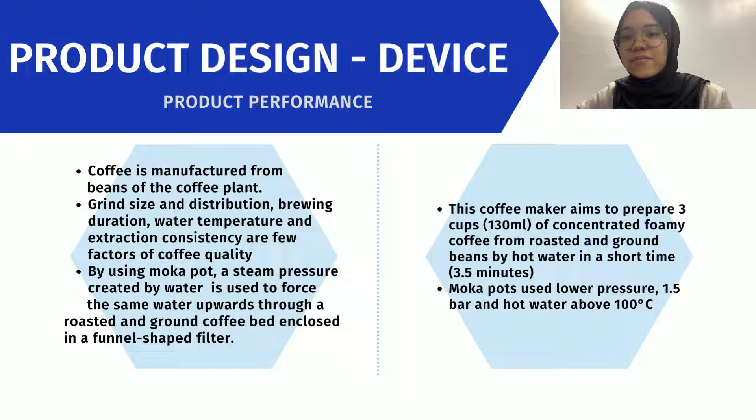Coffee is manufactured from beans of the coffee plant. Grind size and distribution, brewing duration, water temperature, and extraction consistency are a few factors of coffee quality. By using a moka pot, steam pressure created by water is used to force the water upwards through roasted and ground coffee enclosed in a funnel-shaped filter. This coffee maker aims to prepare 3 cups, 130 ml of concentrated foamy coffee, from roasted and ground beans using hot water in a short time of 3.5 minutes. The moka pot uses lower pressure of 1.5 bar and hot water above 100 degrees Celsius.

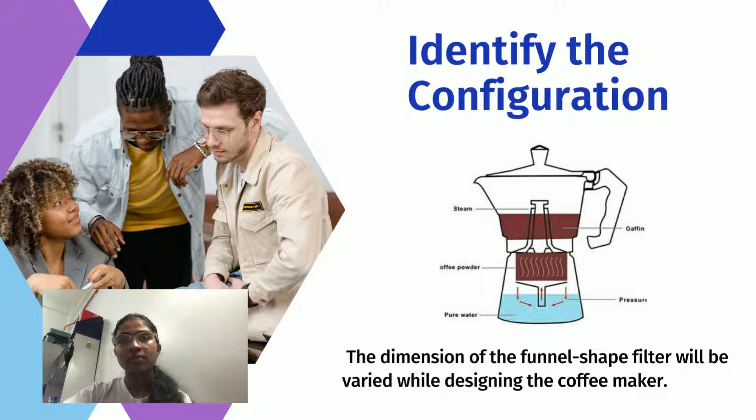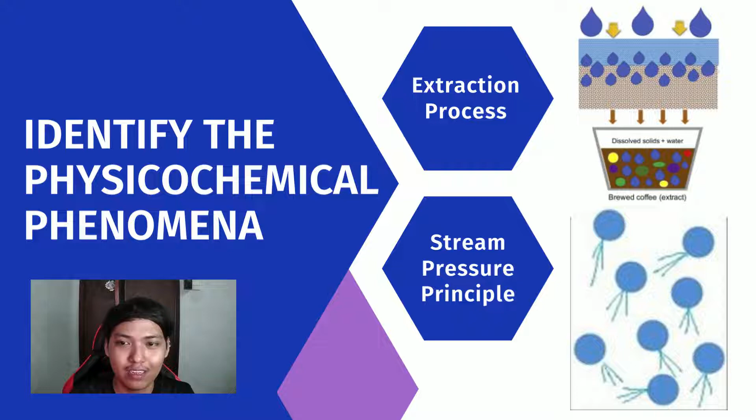Identifying the configuration, the figure here shows the product configuration, and the dimension of the funnel-shaped filter will be varied while designing the coffee maker. For this part, we need to identify the physicochemical phenomena for this product. There are two types of principles involved, which are the extraction process and the steam pressure principle. The solvent used in this process is water.

We transform the product performance into the product specification as follows. The steam pressure necessary to push the water up through the funnel spout is represented in equation 1.

According to Darcy's law of linear filtration, Pf equals mηh divided by K times S times density times T. By solving this equation, we are able to get the desired dimension of the funnel-shaped coffee filter in 3.5 minutes at 150 kPa. We got H equal to 3.5 cm and R equal to 2.5 cm.

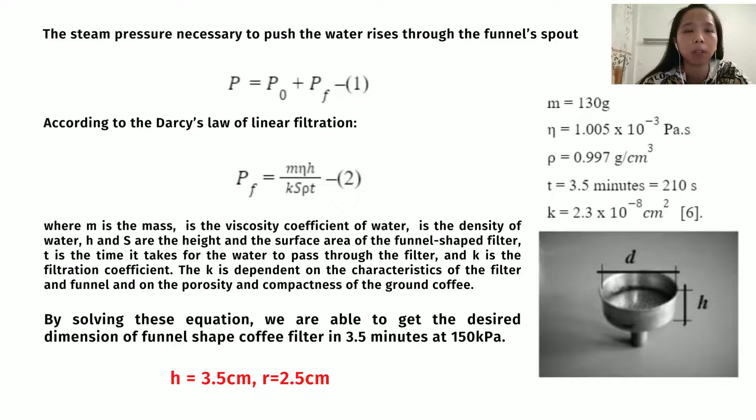Next, to ensure the steam pressure reaches 150 kPa in the moka pot, a safety valve is designed at the side of the water tank. When the steam pressure reaches or exceeds 150 kPa while boiling the water, the steam pressure will push a little against the valve.

And some of the steam will escape from the safety valve. We assume the flow of steam out of the safety valve follows the same principle as fluid flow through an orifice. This is shown by the equation below.

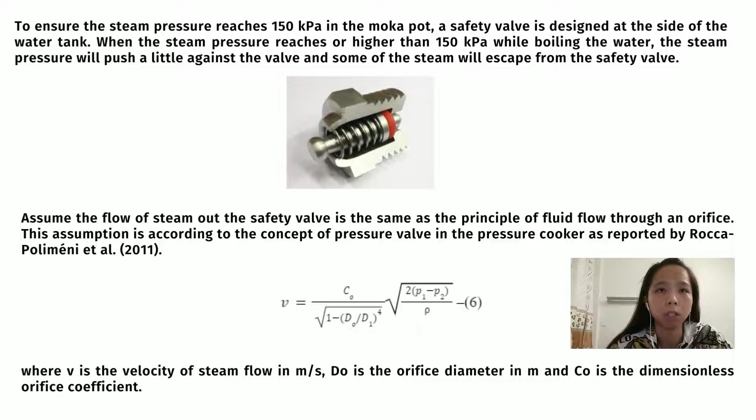The spring constant that 150 kPa of steam could overcome can be calculated from the equation below. By calculation, we get the spring constant K equal to 58.9858 kg per second squared.

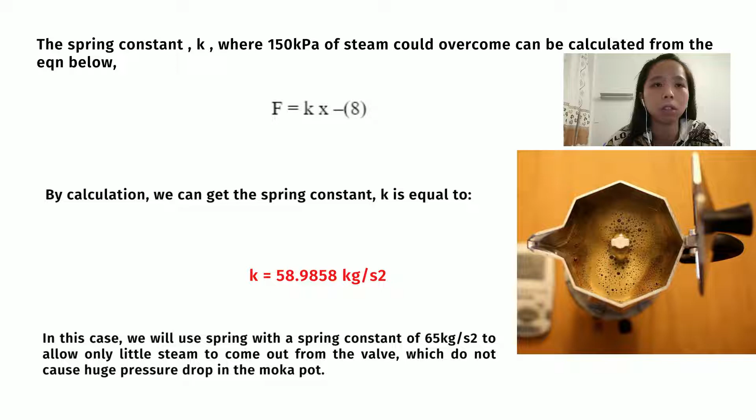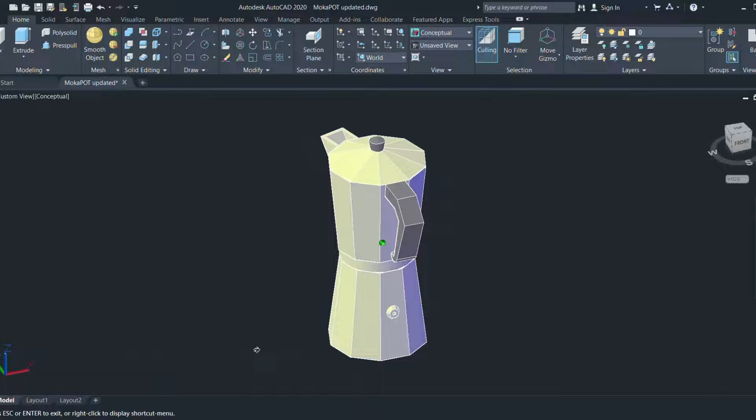The material we choose for the body of the moka pot is aluminium. Meanwhile, for the knob and handle, it is made up of a heat insulator such as plastic. The color we choose for the body of the moka pot is the same as the aluminium, which is silver, and black for the knob and handle.

This is the orthographic drawing of the coffee maker with the dimension labels.

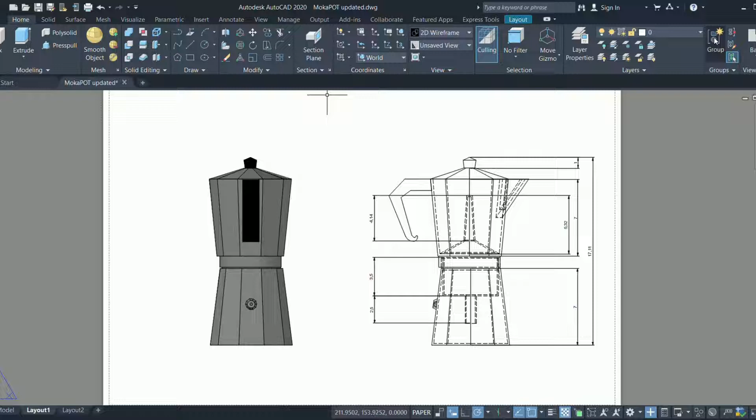This is the sectional drawing of the moka pot with dimension labels each.

A profit margin without considering expenses of at least 150% is expected to cover other expenses. Therefore, the selling price is 69 ringgit and 30 cent.

And for the depreciation, we are using the 5-year property class in the MACRS, and the table shows the depreciation value of the equipment, which is 150,000 ringgit.

To calculate the internal rate of return, we need to assume a few things, for example the fixed and advertising cost, the variable cost. The value of IRR is solved by using Solver in Excel, by setting the value of net present value to 0, and the IRR for this project is 21.02%, which is higher than the bank interest of 6%, indicating that this project can be carried out.

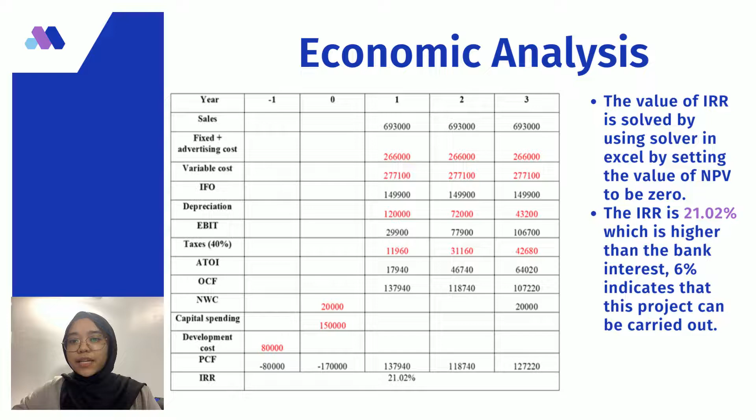Let's look at the Sustainable Development Goals. Our product is related to Goal 12, where we can switch to sustainable packaging alternatives. For this goal, it's also important to consider how you manage waste, by reducing the impact of byproducts or repurposing them, such as using coffee grounds as fertilizer or biofuel.

The other one is Goal 14, where we have to switch from plastic coffee packaging to a more sustainable alternative, opting for an eco-friendly option such as kraft paper or rice paper coffee bags. Roasters can contribute to a circular economy without polluting the planet's ocean.

Sustainability in the market, so there are three: customers will find it easy to use, easy to clean, and also safe to handle.